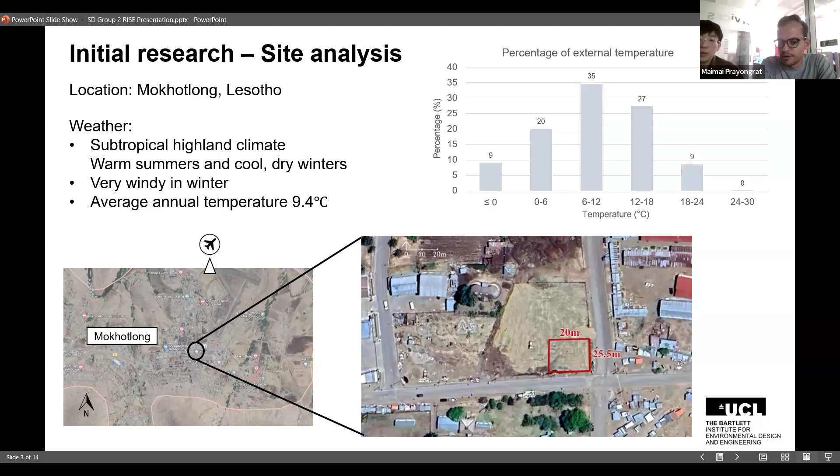As part of the initial research, we wanted to look into vernacular architecture from Lesotho, and we came across two initial concepts that we considered for our design.

The first was the rondavel. Rondavels are circular houses designed to efficiently resist the harsh climate of Lesotho, and they are often decorated with vibrant colors and intricate patterns.

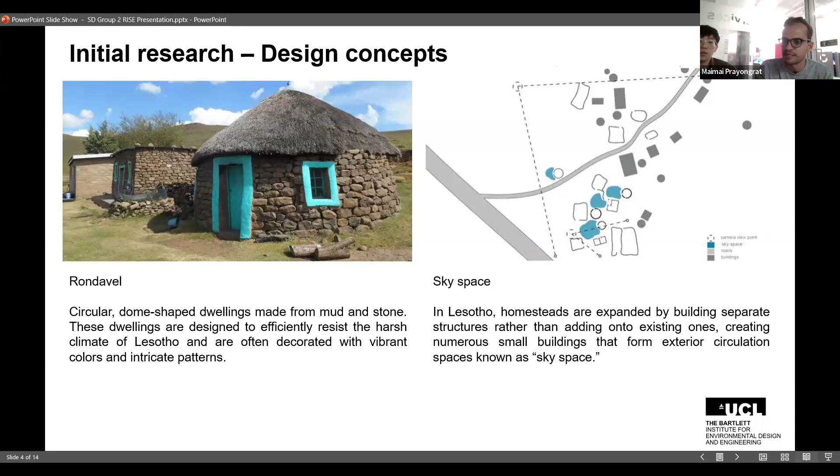The second concept we came across was the sky space. In Lesotho, homesteads are usually expanded by building additional structures rather than adding on to the existing one, and this creates an external circulation space known as sky space. We found this concept very interesting, and even though for our project we didn't design additional structures, we wanted to bring this idea of sky space into the original layout.

The next part of our initial research was building materials. We had a list of materials we wanted to investigate, and we prioritized low carbon, low cost, and availability. We listed them and color coded them based on which was more efficient for our project.

We selected concrete earth blocks, thatch, and sheep wool for insulation because of their low cost, availability, and low carbon.

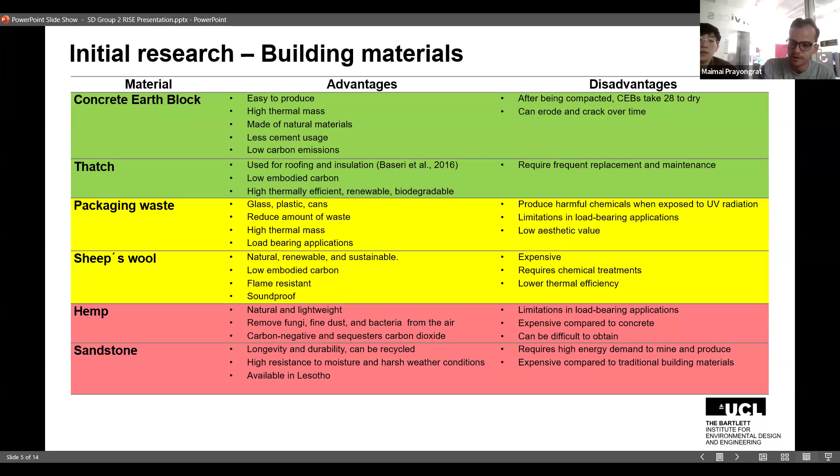For the final part of our initial research, we did a shoebox analysis in which we tested different types of materials for the wall and roof, different types of glazing, window to wall ratios, shading, and orientation. In the diagram we can see what we selected as the best options for our design.

For the final orientation, we concluded that the optimal one was northeast, because this is where we would get more solar gains that would be beneficial to keep internal comfort in the dwelling during the cold winter months.

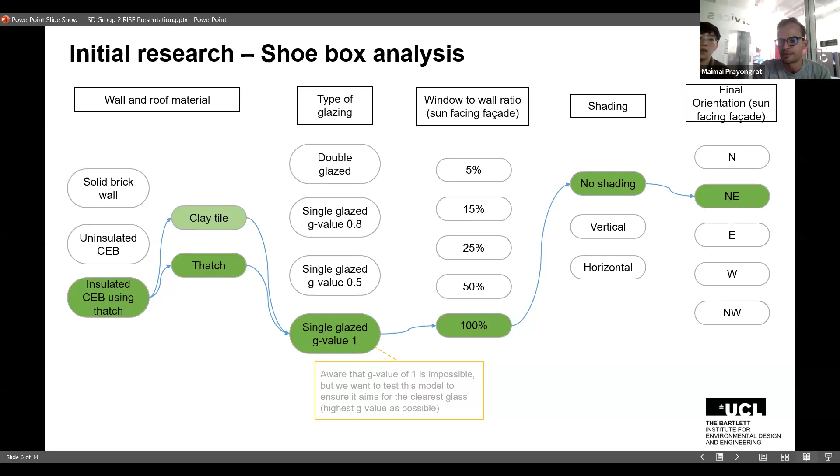For the environmental strategy, I want to stress 2 points: the first is the layout of the building, and the second is the isometric diagram.

Since we studied the vernacular architecture, the round shape of buildings in the local area, and also the sky space, we tried to apply these two strategies into our building. That's the reason we have a sky space in the middle of our building, and the building has a round shape. We also reorganized the plan of our building.

As you can see on the right part of the plan, we put most glazing in the northeast of the building. As mentioned, we got the best orientation to the northeast so the thermal comfort in the living room could be at a good level and people inside could feel comfortable. The rendering on the right shows the entrance and the sky space.

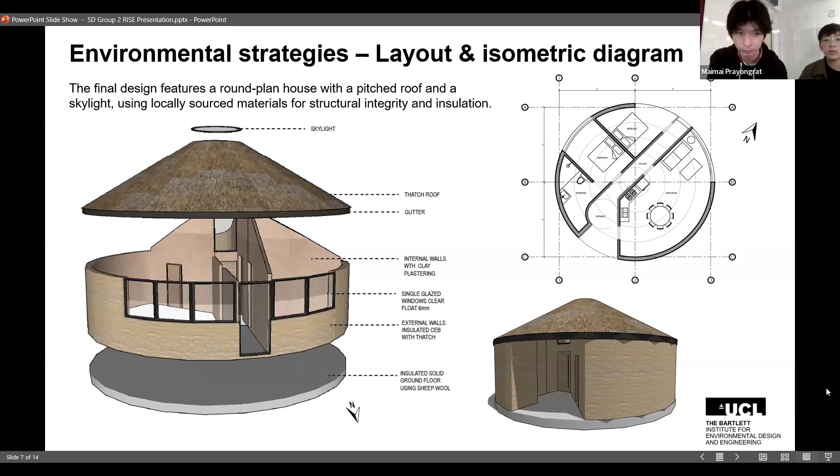So this part is about the seasonal section. You can see in the thermal mass we use CEB. It can absorb the heat in the daytime and release heat at nighttime, so that people in the bedroom and living area could feel quite comfortable.

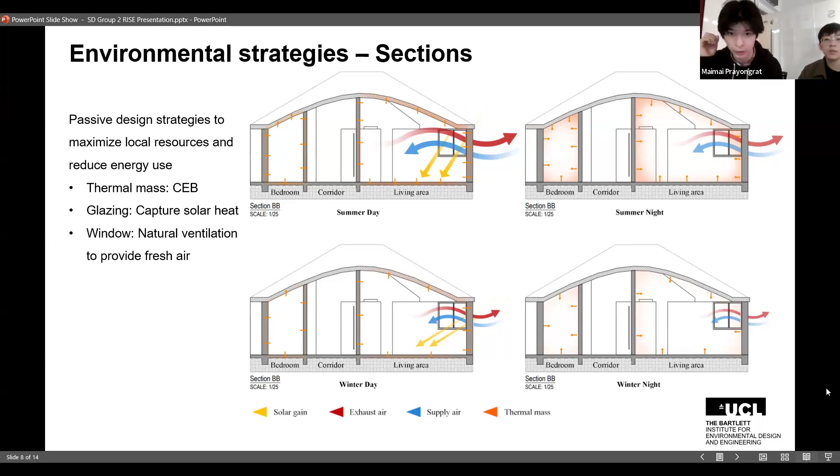And glazing, the window plays a key role also in thermal comfort. It not only captures solar heat, but also introduces fresh air and exchanges the exhausted air to the outside space.

For the initial and final model, we did different iterations for our building. At the beginning, we tried to do a reverse roof building, but for buildability it's a little bit hard because the snow load could be quite high and it would crash the roof. So we changed into a pitched thatch roof with a central skylight.

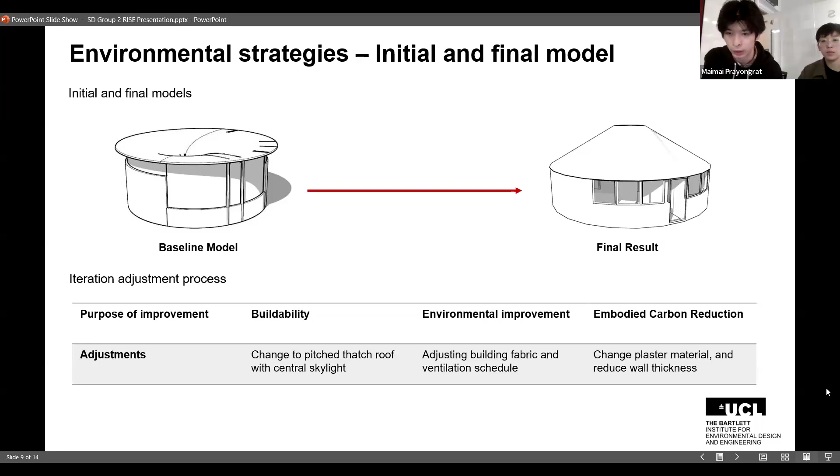We not only thought about buildability, but also environmental improvement. We adjusted the building fabric and ventilation schedule a little bit, and finally we optimized the embodied carbon in the building, changing some materials and reducing wall thickness to achieve that.

For the living area, following the guideline of a naturally ventilated house, the comfort temperature should be between 18 to 24 degrees Celsius. And for the sleeping temperature, it should be between 17 to 24 degrees.

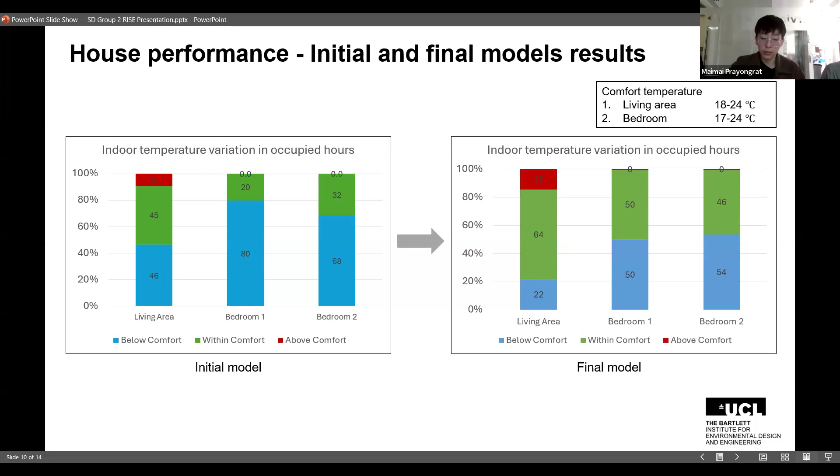As you can see, we changed the layers of CEB to make the most use of its thermal mass abilities. We also changed gypsum plasterboard to clay plasterboard, because clay plasterboard has thermal mass abilities as well, and gypsum plasterboard has high embodied carbon.

Also, to achieve the results in our final model, we adjusted the window opening times. For bedrooms, it needs to be partially open throughout the night. For the living area, it can vary by temperature, but basically open the windows when comfortable and close when cold.

This resulted in the achievement of our final model: increasing overall indoor thermal comfort hours in all spaces, and also reducing material use and embodied carbon.

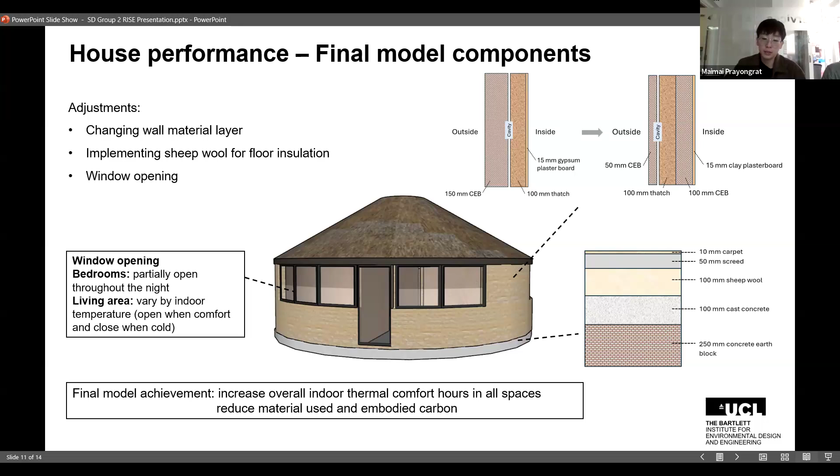We can also consider the building design to capture more sunlight. This can be done by changing the locations and size of the skylight windows in bedroom 1 and 2.

Also, as the overheating issue arises in our final model, even though it's not our main issue, to deal with this we can utilize passive cooling strategies such as external shading and nighttime ventilation.

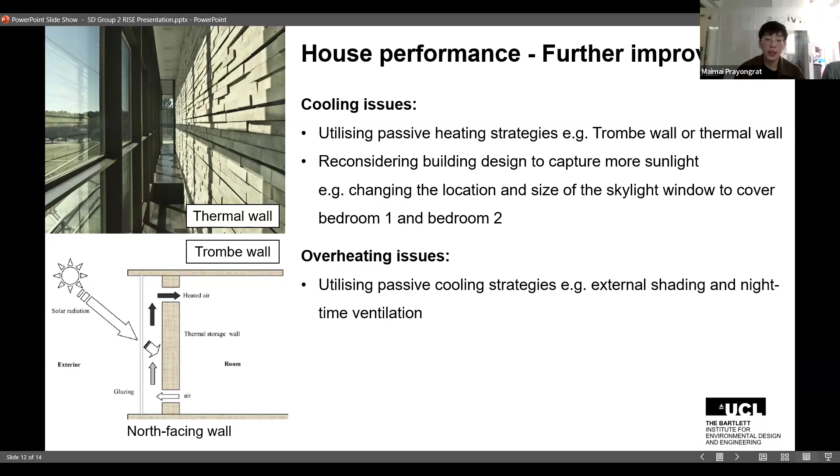Thank you for listening. We hope our findings are useful for you, more or less. Thank you.

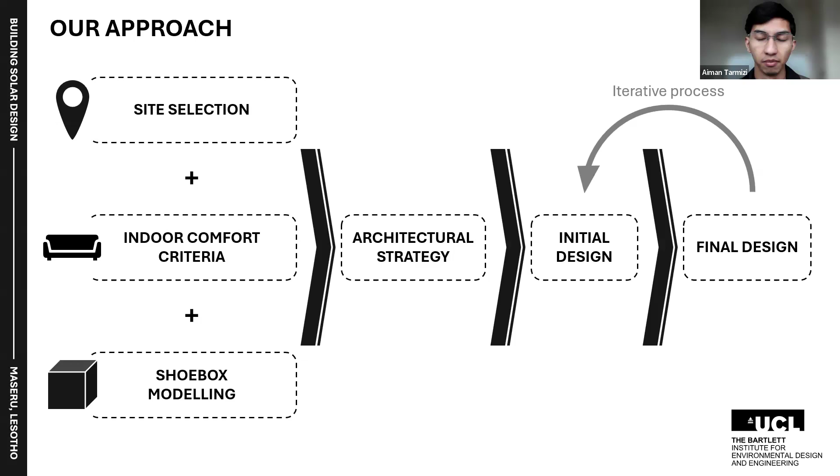So starting off, this is our approach. First we look at the site selection and the indoor comfort criteria, then we did a bit of shoebox modeling, which translates into the architectural strategy, initial design, and final design. In between the initial and final design, we have an iterative process where we test a lot of different things to see how we can further improve and make sure the building performs as we intend.

In terms of context research, we first did a bit of research on demography and culture. We looked into the vernacular architecture in Maseru, which led us to finding the design of the Basotho hut, which gave us an understanding of how local materials could be used and how dwellings are designed in Lesotho.

We also looked into the clothes and appearance of Lesotho people, which led us to an understanding of how people adapt to the cold climate and cold seasons in Maseru. We also looked a bit into school timings and the different building forms in Maseru.

From that research, we came up with an occupancy schedule for the occupants of the house, which takes into account the different users, including the parents and the kids.

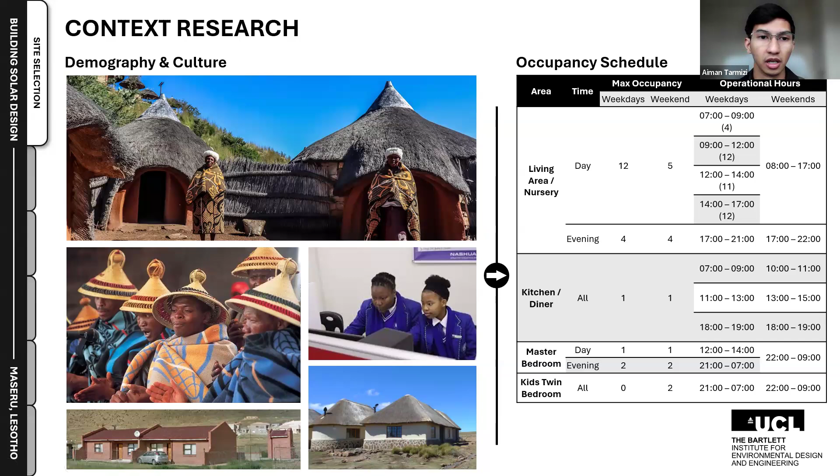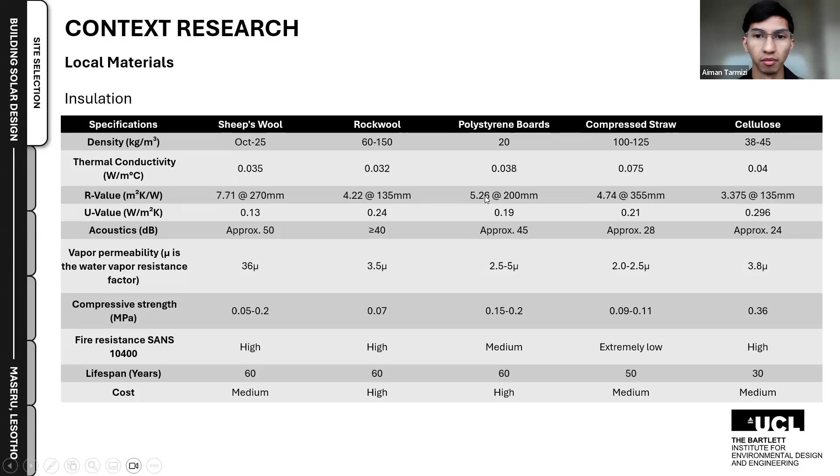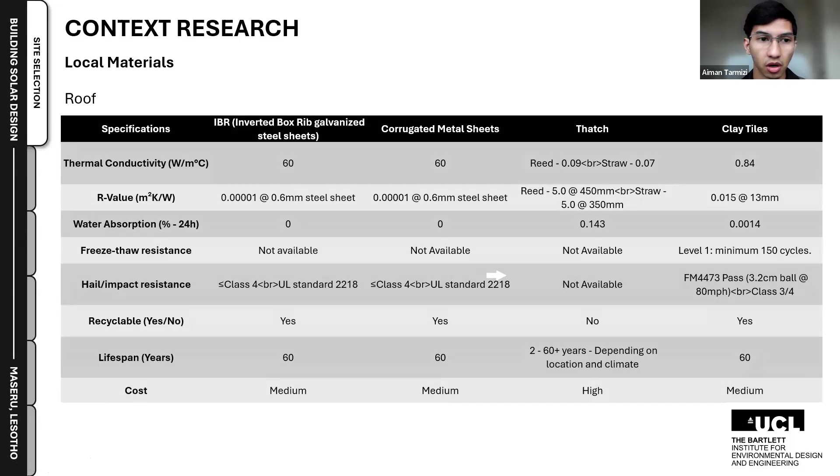Moving on to site selection - in our demographic study, we found that the population of Maseru, or Lesotho in general, is mainly Christian. So we figured it would be best to find a location nearby a church as well as a school, so it would be easy for parents to send children to school and for grandparents taking care of the children to reach the house. So we decided to select the site at Masoweto.

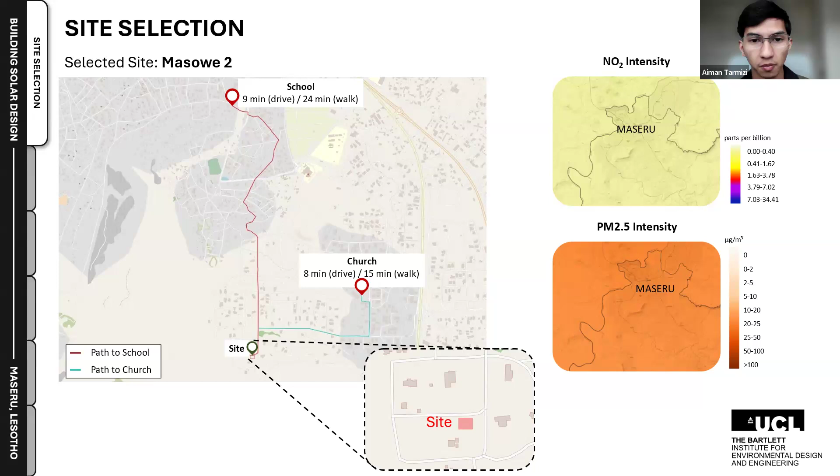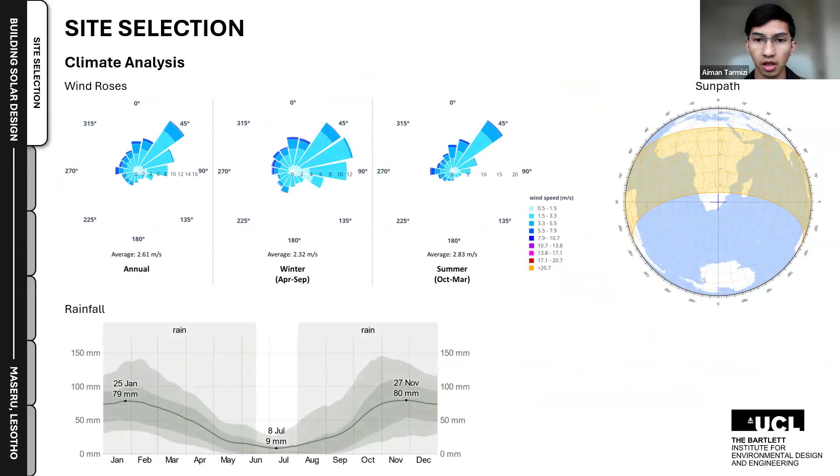We also looked into the climate analysis, which was explained by the previous group as well, and looked into the wind roses to see where wind would come from. All of this climate analysis was important because we used this information to start our initial criteria, the indoor comfort criteria.

For our group, we calculated the thermal comfort range based on the ASHRAE 55 adaptive model, and found the range for the cold season to be 18.6 to 26.6 degrees Celsius, and for the hot and rainy season to be 22 to 29 degrees Celsius. We also set other environmental targets, including humidity, noise levels, and CO2 levels.

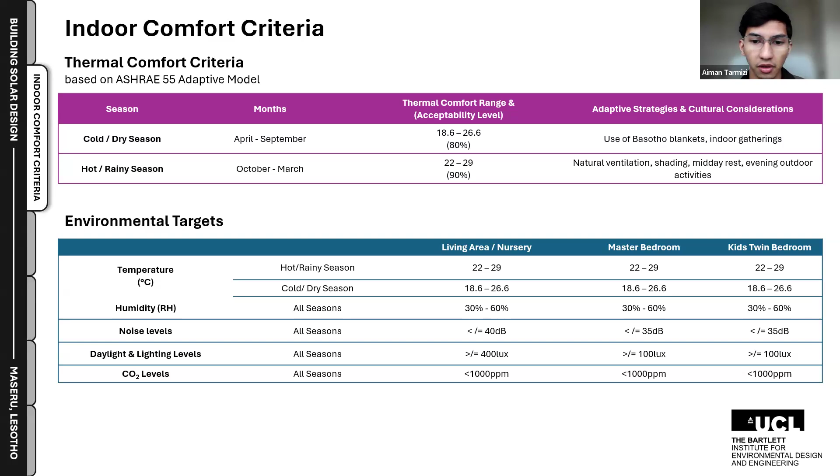Based on all the information we researched, we started doing our shoebox modeling, where we tested a bunch of different configurations to see which would be best for us to start our design.

We found that the blue represents the best simulation for each category. But when selecting our first design, we didn't base it just on getting the best thermal performance - we also considered other factors like cost and the availability of materials within the region, among other things. So we found that facing north is the best for us.

And then we have the long and narrow shape, which is quite a simple shape, I would say. And then for the roof, we found that thatch performed the best. That's quite good because it's a local material we can use.

Also for walls, we found that fired bricks, the typical bricks, perform a bit better than the local material CEB. But we decided to go with CEB and plastic bricks because that's more available, and the differences were not too big to be a problem.

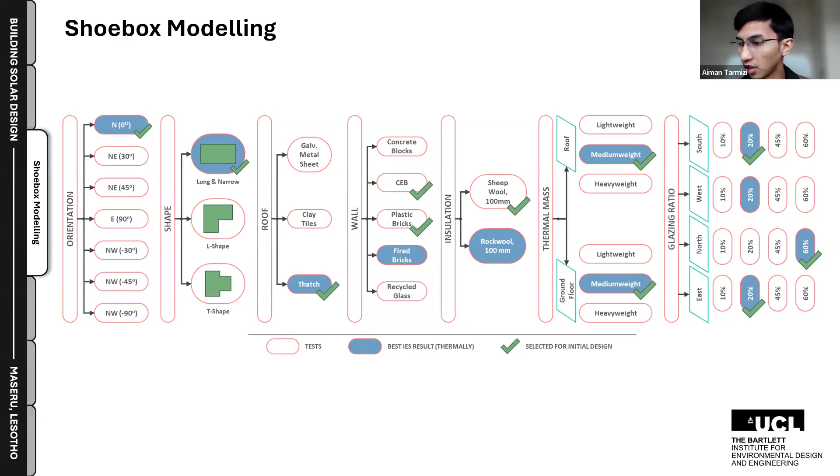Same goes with the insulation. In terms of thermal mass, we decided to stick with medium weight thermal mass, and in the glazing ratio we tested different building facades to see which ratio would fit us best.

From that, we came up with three design pillars: familiarity, replicability, and adaptability. Familiarity is so that the design is familiar to the local population. This is important so that the design is not too extravagant, not too weird in a way.

Replicability is so that, since we're working with RISE, we wanted the design to be as replicable as possible, so that if RISE replicates the project anywhere within Maseru that has this same microclimate, it will be doable.

In terms of adaptability, we tried to think about different sets of occupants as well, not just the set of family given to us through the brief. Having this kind of thinking gave us more constraint or room to think about what will happen to the house when the family goes out, or if it's changed with another set of family, and so on.

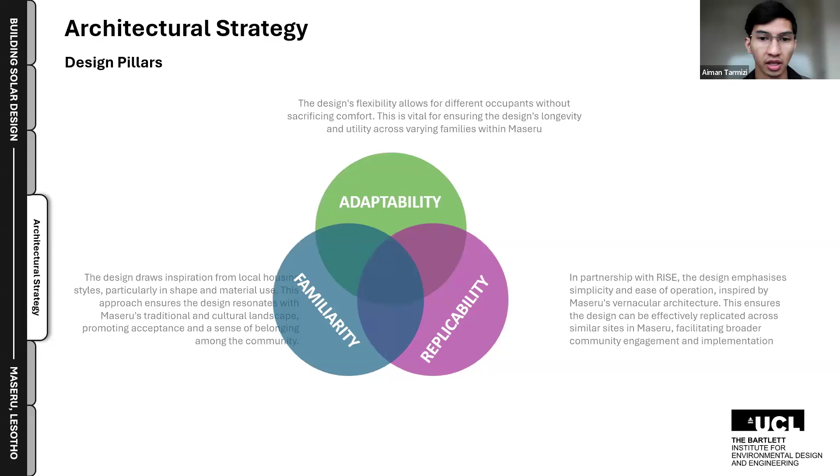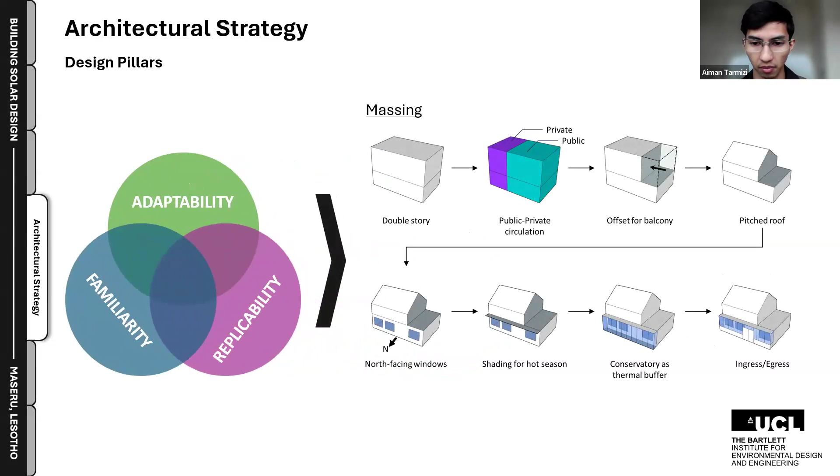From there, this is the basic idea, the massing of the building. We have double story, public and private circulation, and an outdoor balcony with initially some shading, which then changed to a conservatory due to some reasons, which I will explain later.

This is the layout. The public zones will be on the ground floor, and private zones are mainly on the first floor, with the twin bedroom being on the ground floor. The twin bedroom is the kids' room in this project.

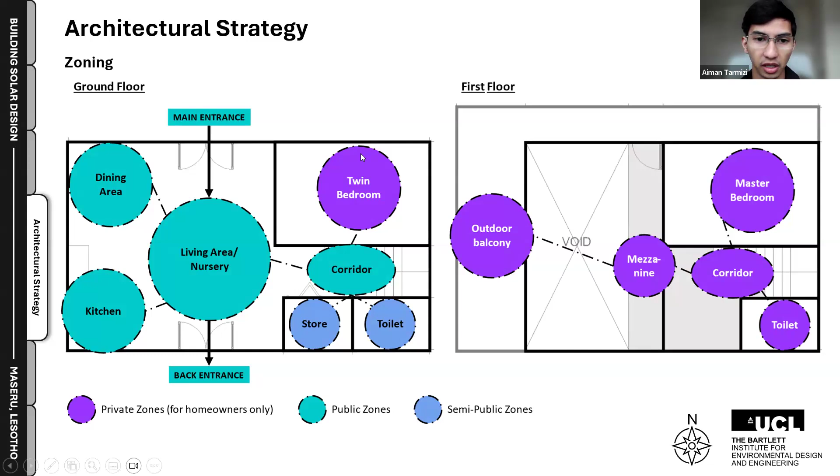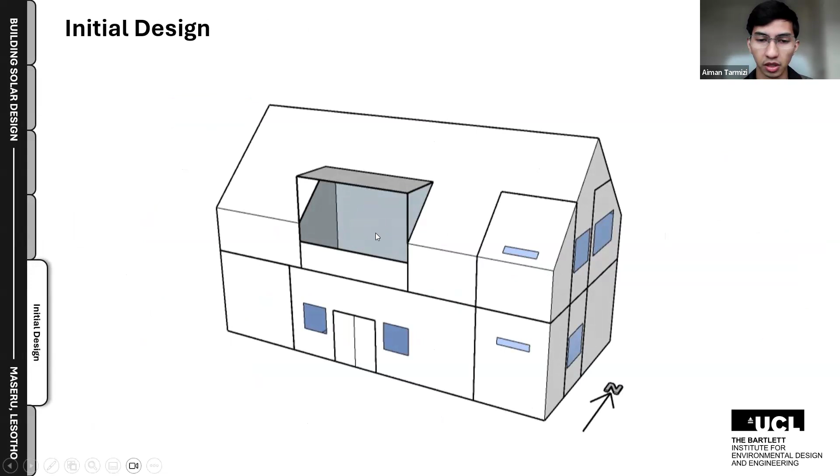So this is how the initial design looks. It's quite simple. This is the south facade, and here we have a balcony on the south facade for occupants to enjoy sitting on, being shaded from the sun.

Initially, the environmental strategy was a combination of cross ventilation and stack effect. But we found this wasn't actually that effective as a ventilation strategy, because of the low wind speed, which was not enough to drive the cross ventilation effect.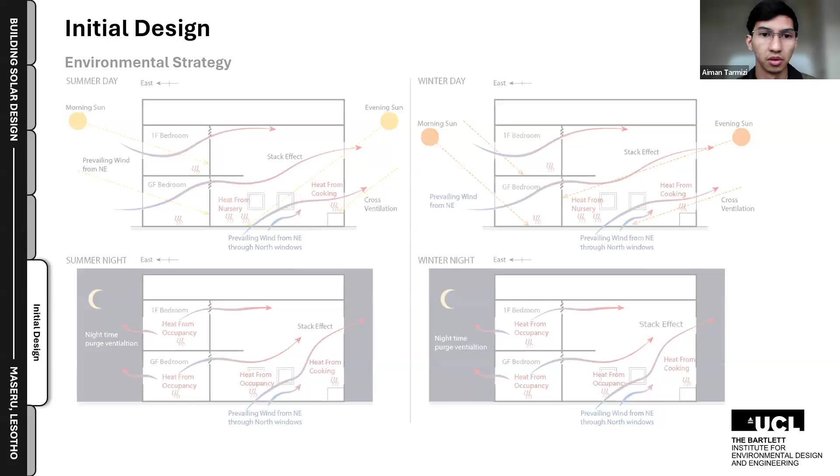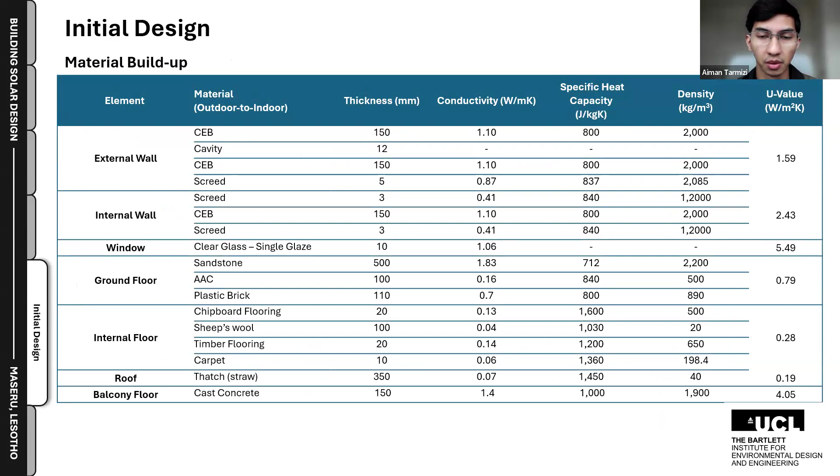So this is the build up. In this early design, we already focused on trying to use as much local material as possible. But some of this then changed throughout the design, due to trying to make it better performing, or other reasons.

Because of cost or availability, this is the final design. So we have the thatch roof, which is what we started off with in the initial design. And then we have this conservatory on the north.

Initially this was shading, but we saw that one of the problems we were facing was the spaces on the ground floor being cool. So when we tried having a conservatory on the north facade, it actually helps warm up the ground floor spaces by making it into an indirect solar gain system.

For the walls, we have CEB and sheep's wool, and we also have a chimney, which helps facilitate the stack effect ventilation. The chimney is designed with a metal roof, so that it gets heated when the metal roof gets heated up during the day, which helps further drive the stack ventilation effect.

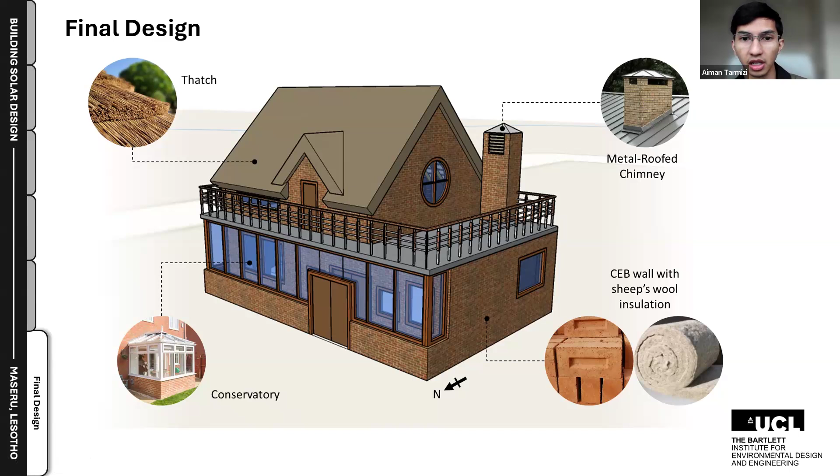And yeah, this is our final environmental strategy. As you see, most of it is driven by stack ventilation. We also actually have thermal mass on the walls, and a little bit on the ground floor as well, because we are using sandstone.

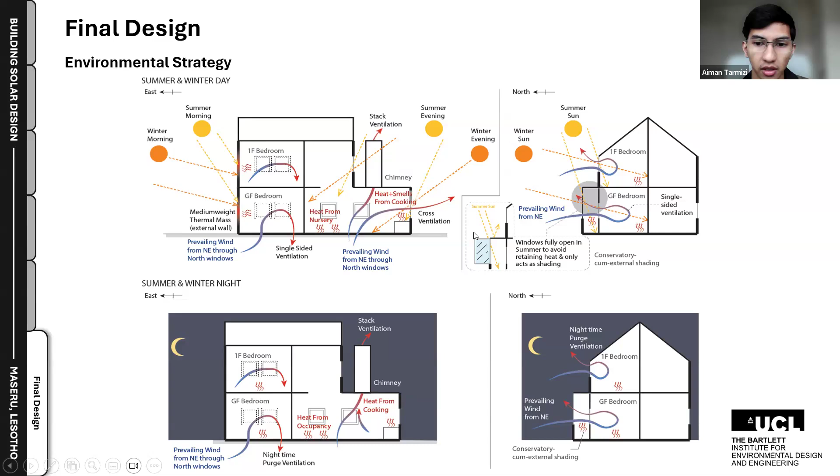Yeah, this is the material buildup. And the main changes here was on the ground floor, where we changed from plastic bricks to just using sandstone and AAC.

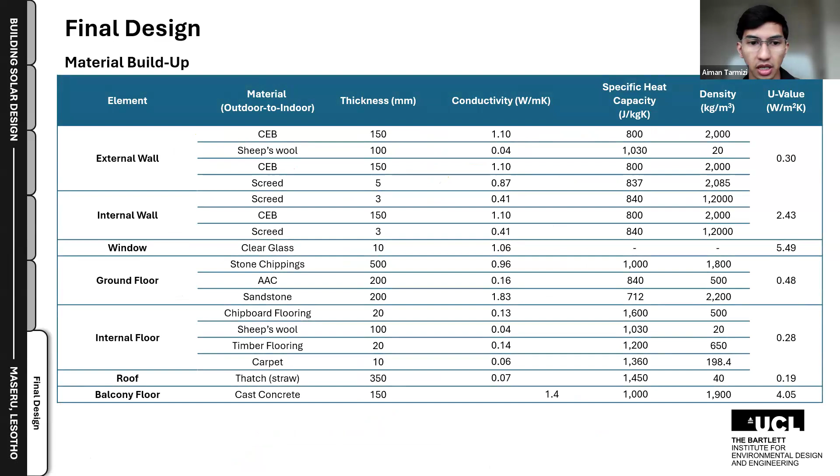So in terms of performance, from the base case to the final design, this is how it ended up. In the base case, we can see we have overheating problems and also underheating problems, meaning the spaces are cold, and also a little bit of CO2 problems. But after we made changes to the design through the iterative process, we ended up with just a slight overheating problem, whereas we still have a little bit of underheating problem, but it has decreased since the base case.

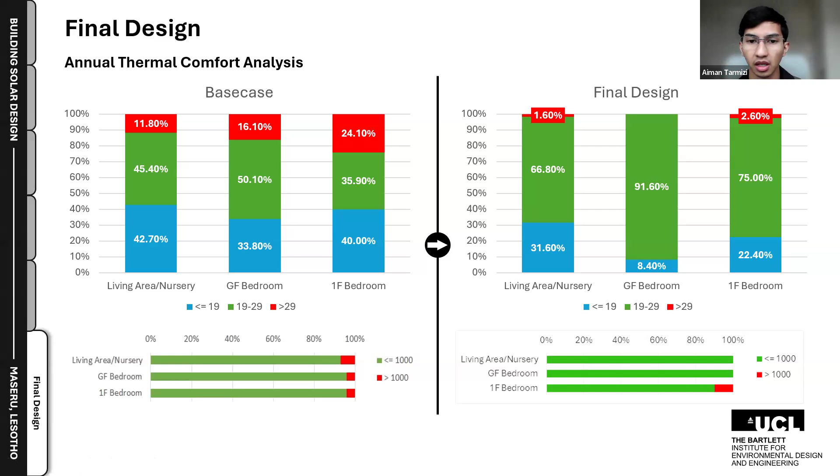And that is all from us, Group 3.

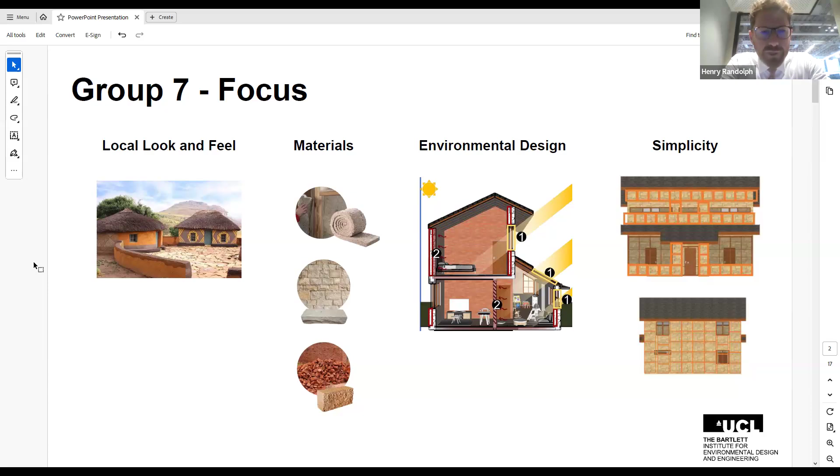And then this final point about simplicity: could this be something that could be replicated? Was it a design that local builders could easily put together, that could source the materials for, that could be replicated around the country?

So just to show you where our design got to in the end, this is the final rendering of it, and I'll talk you through how we got there now.

Thinking about look and feel, there were a few key things I'd emphasize in the way we came about our design. I think other groups have mentioned the idea of the sky space, and this is something we really liked. We wanted to make a really central point to our building. This is a public-private building because of its childminder nature, but that also seemed to be reflected in the indigenous architecture we saw in our research.

So we tried to make the center of our design a public-private room, which we called the childminder's room for the purpose of this, which ran the full length of the front of the building, benefited from the most light, and would be the entry point to the property, but also where most of the time was spent for the occupants. Therefore we focused a lot on how we made that room work from an environmental point of view and a usage point of view as a key part of the strategy.

So that led to that room being north facing. It led to us wanting lots of glazing to try and let lots of natural light into that room, but also mitigate overheating and other things that would come up as a result of having that room used in that sort of way.

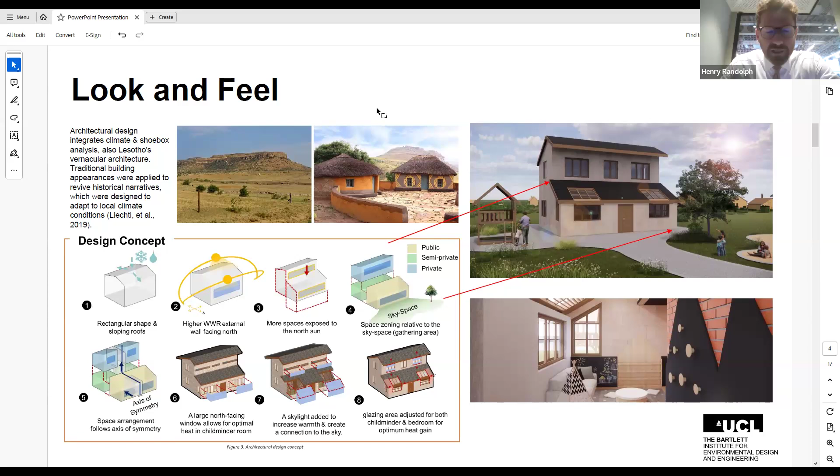Other things we looked to replicate, and actually didn't quite make it into our final design, but if we were looking to the future, we'd go with it: we loved some of the patterns we found within the local architecture, and also this axis of symmetry point, the symmetrical nature of the buildings we saw there.

So just looking at materials and what we ruled out, what we ruled into our design. I think we looked in detail at the materials listed here, so looked at thatch roofs, hempcrete, and also renewable building materials, and considered how they could be used within the design of the building, as well as these three indigenous materials: sheep's wool, sandstone, and compressed earth blocks.

I think while we liked the thatch roof, when thinking about simplicity and durability of that material in roofs, especially on a 2-story building, the 3 to 5 year life cycle before maintenance was needed led us to rule that out in favour of concrete tiles, which we actually found to be more environmentally friendly than other materials we looked at for the roofs, especially with rainfall and potentially snow being incorporated into what that roof would have to deal with.

From the renewable materials we looked at, we looked in quite a bit of detail at how they could be used and where they've been used in other projects, and we found that the materials, in all sorts of different uses, were just not reliable. We doubted there would be a reliable supply of those materials, and even where there was a high density available, in all sorts of different ways they didn't have the reliability to use in a building such as this.

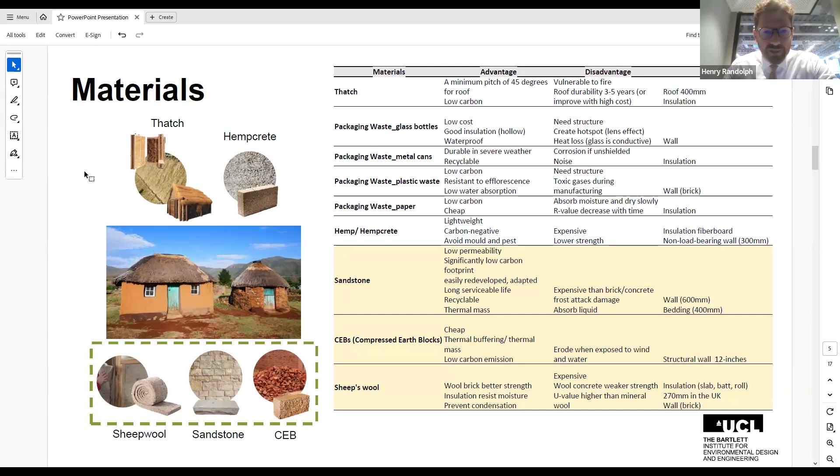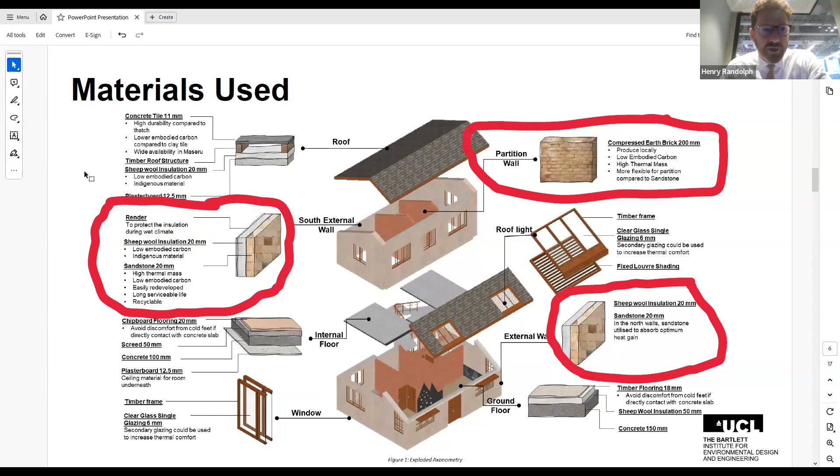And then sheep's wool seems to be a very sensible material to use for insulation. So just very quickly where that fitted into our design: we used the compressed earth brick for internal walls where they wouldn't be exposed to weather, and then the sandstone and sheep's wool combined together on external walls to have that thermal mass on the exterior and long life cycle, but have the insulation benefits of the sheep's wool within.

In guiding our environmental strategy, like the other groups, we carried out our shoebox analysis, which led us to go to a cuboid space for the shape of the building, which was a bit of a shame in some ways because some of the round architecture in Lesotho was very interesting. But again, from a simplicity point of view, we found it more difficult to design rooms and use environmental strategies with that shape. It also led us to have a north orientation, wanting to find a way to increase the level of glazing.

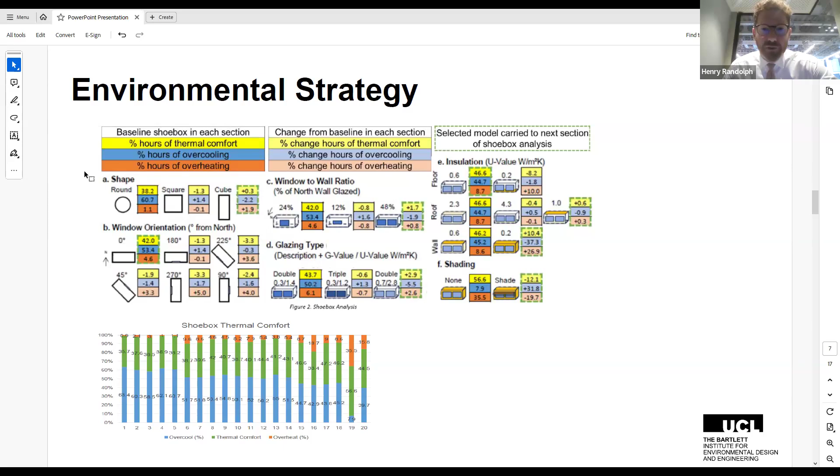So we looked at secondary glazing rather than double, again to keep that simplicity within the design, and a real focus on shading to improve thermal comfort within the building.

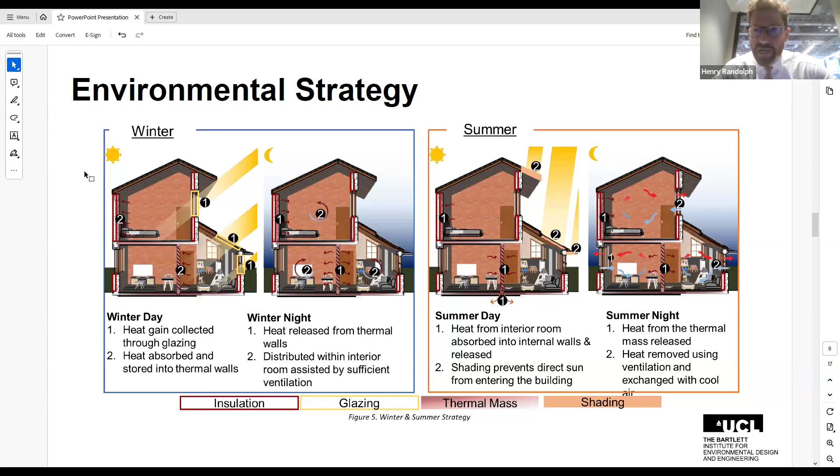On those environmental strategies, the key ones are here, and through iterations and testing we found a good balance of insulation, that secondary glazing point mentioned, and the right ways to use thermal massing. For example, we originally had quite a lot of thermal mass on the second floor, but we decided the benefits didn't really outweigh the costs of the additional structural work. And then I think the big point for us was around shading - getting natural light and solar gains into the building during the winter, and then finding a way to mitigate them through shading in the summer.

So you can see the key iterations that we carried out here, and I think the key for all of them was to try and keep things as simple as possible. So you can see it's mostly about changing materials, and then adding those environmental strategies that I mentioned in the previous slide.

And from a results point of view for the childminder room, through our iterations we went from a predominantly overcooling problem to actually managing to get the heating into that room, which helped during the winter months, and then found ways to mitigate overheating during the summer through the way ventilation control was carried out, shading was carried out, and that insulation and glazing point really being the focus.

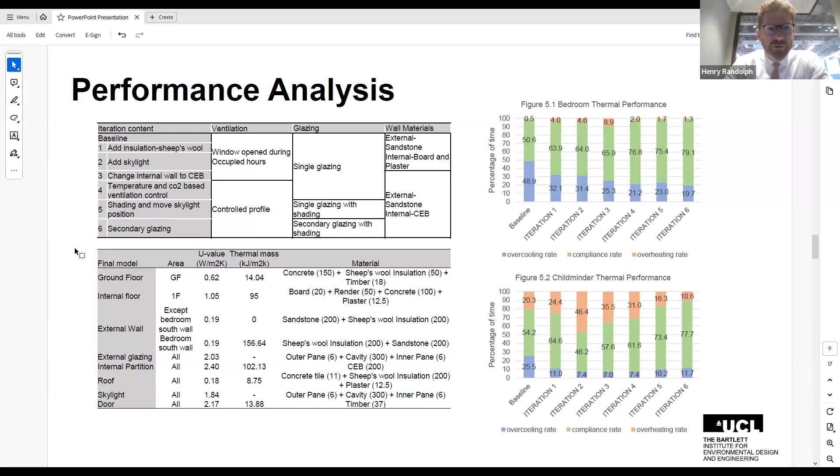Finally, on simplicity points, we didn't get to this in the end, but there was a real focus in our group for where we'd want to go with further work, about sandstone and how that could be used, given the abundance of it in the country. If it was used in much more construction within the country, you'd think costs would be driven down, and you'd potentially build a skills base amongst contractors who would be putting together these buildings repeatedly. We looked at whether we could create a design that incorporated a grid program into it, so sandstone could be cut in a more uniform way to be used most effectively, and also to make designs between different buildings straightforward in the crossover, since that material would be cut in a consistent way. So it was a concept we were thinking about for the next stages of thought.

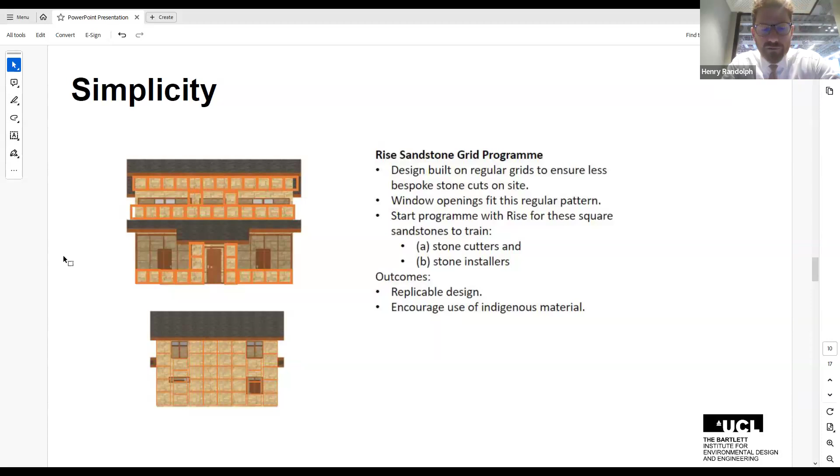Brilliant, that's the end of our presentation.